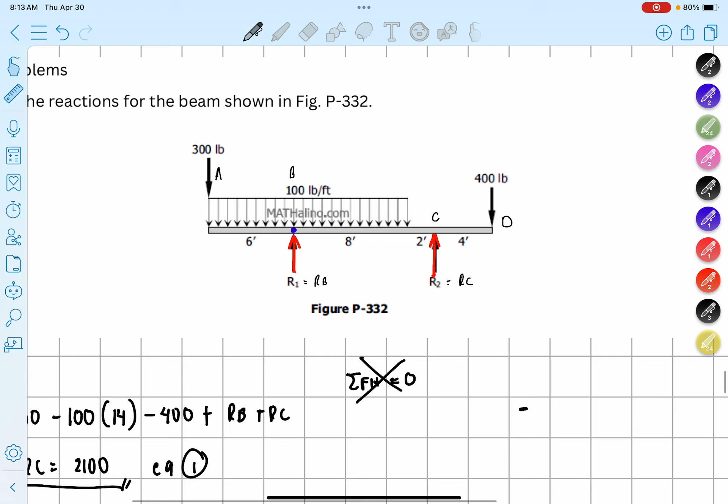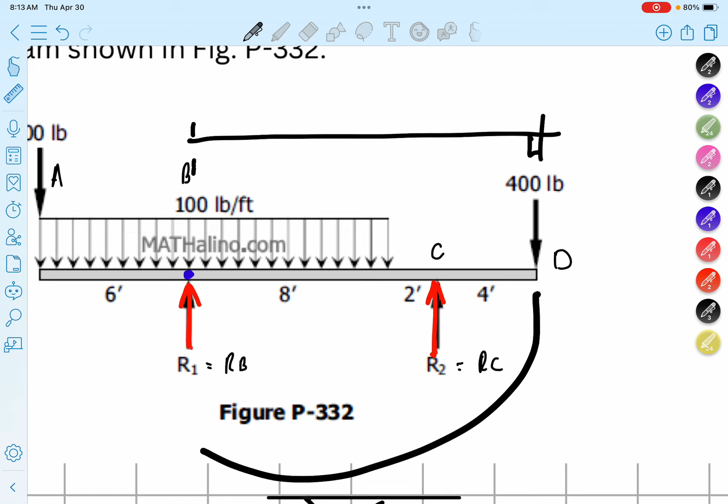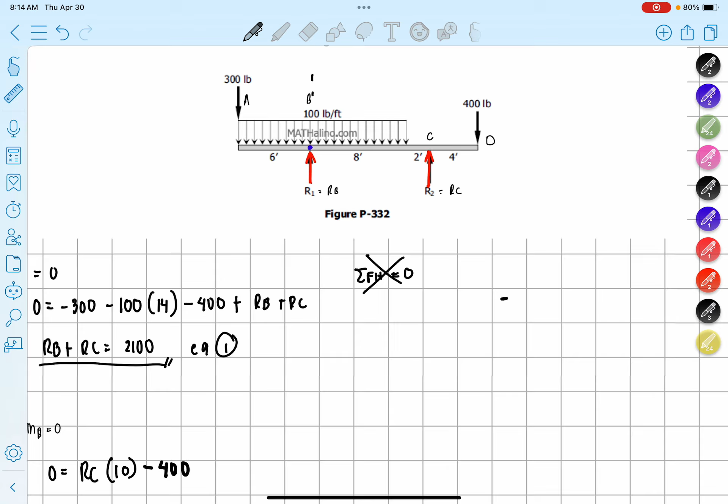Minus 400. Ano yung perpendicular distance from point B? We have 8 plus 2 is 10. 10 plus 4 is 14. Okay? So, meron pa ba tayo sa kanan?

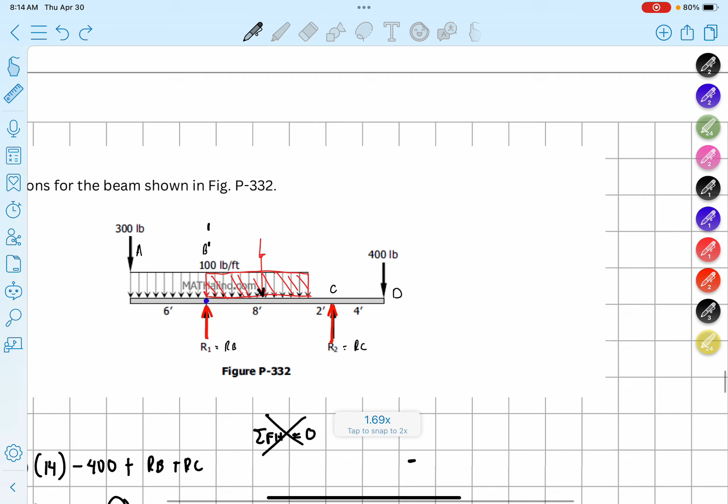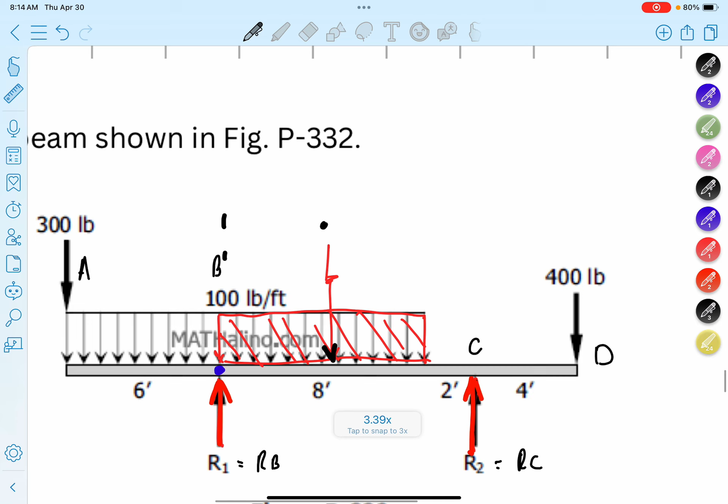100 multiplied by 8. Okay? 100 multiplied by 8, makukuha mo na kanyang resultant. So, technically, this is 800. Tama? Yung 800 pound na yan. Yung 100 times 8 is 800 pound. Ngayon, ano yung distance netong resultant mo dyan? Di ba pagka rectangular, nag-a-act yan sa half ng base natin. So, ang half natin is 8/2.

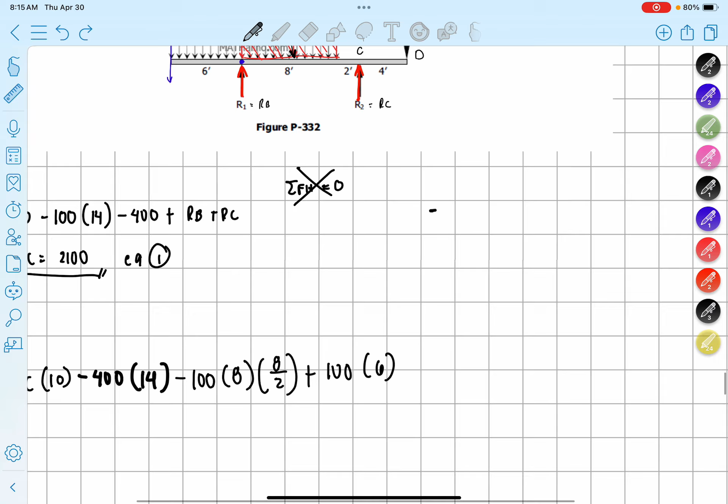So, positive 100 multiplied by 6. Ano naman ngayon yung perpendicular distance niya? From A, we have 6. Okay, so this is multiplied by 300. 300 pala yun. Okay, so this is plus 300 multiplied by 6.

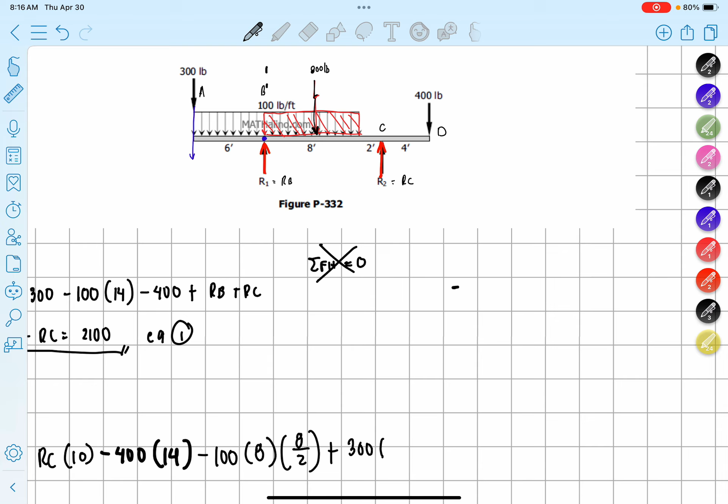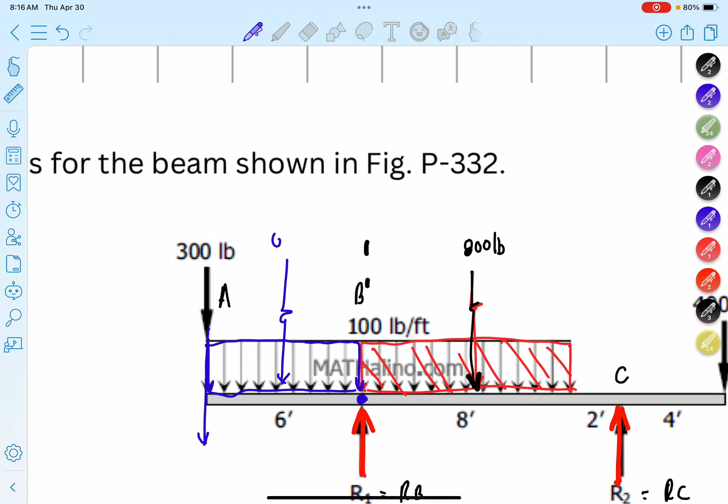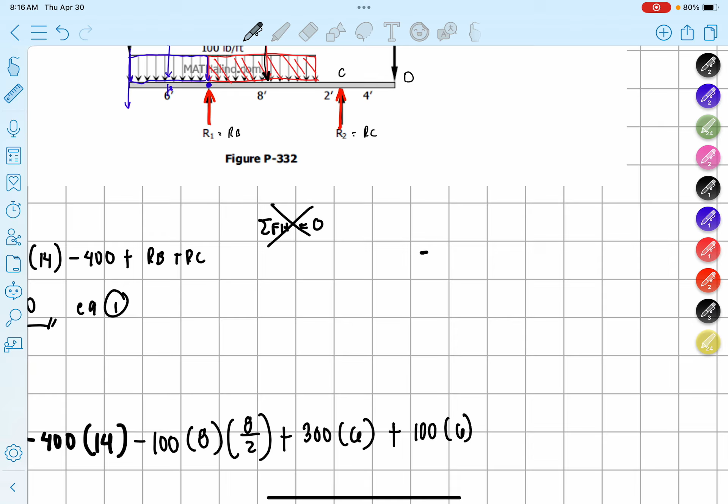Ngayon naman, since meron pa tayo isa pang uniformly distributed load dito, hinati nga natin siya. Makukuha naman natin yung resultant dyan. In this case guys, still 100 pa rin yung height ng rectangle mo. This is 600, acting sa kalahati ng base na 6. So, iikot yan ng counterclockwise din from the pivot point. So, plus 100 times 6, which is 600, multiplied by kalahati ng 6.

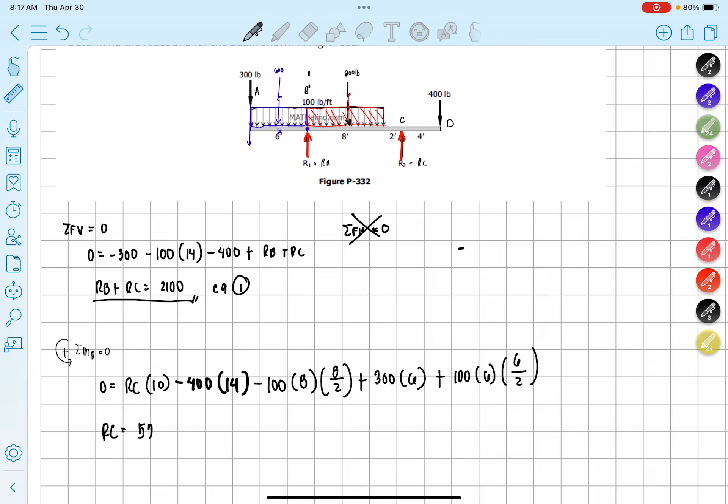In this case, 0 is equal to RC times 10 minus 400 multiplied by 14 minus 100 multiplied by 8 multiplied by 8/2 plus 300 multiplied by 6 plus 100 multiplied by 6 multiplied by 6/2. Kapag sinolve natin yan, this will be 520 pounds. So, ayan guys yung ating sagot for RC.

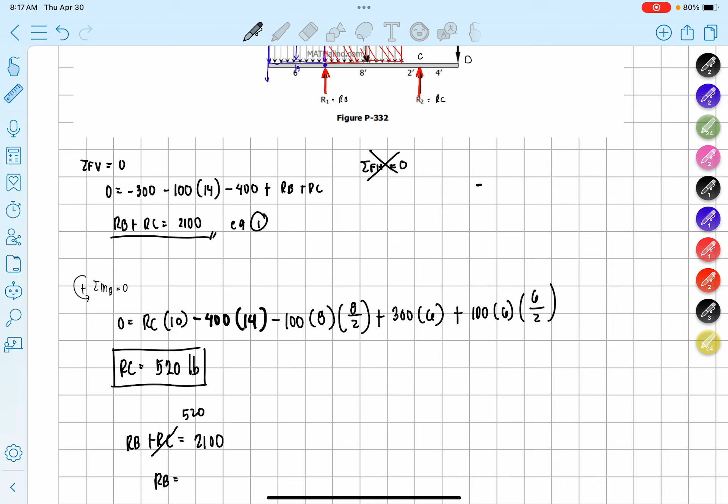Ngayon naman, for the summation of vertical forces is equal to 0. Dahil meron tayo RC, pwede na natin i-plug in sa equation 1. From equation 1, we have RB plus RC is equal to 2,100. Since we have 520 na RC, si RB ngayon is 2,100 minus 520. This is equal to 1,580 pounds. Okay, that's the answer for our problem number 1.